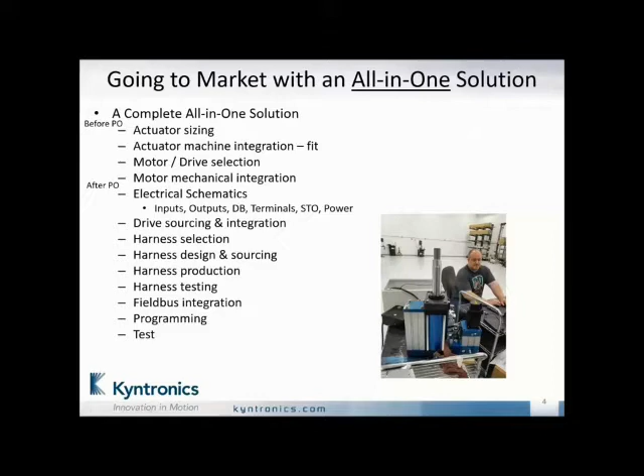There we go. So that's the all-in-one. It's unique because a lot of competitors do not do this. So it's something different that we all have to get used to. So the finger pointing is only Kyntronics. We're the owner in regards to the all-in-one. Nobody else to point the finger to.

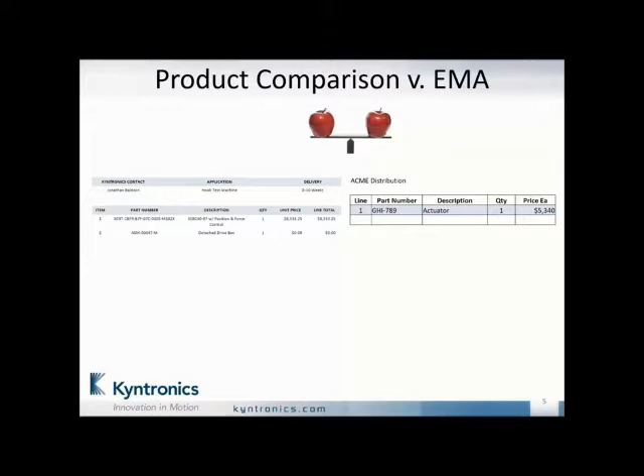We own the solution. So the product comparison versus the EMA. This is another important part of it, apples to apples. The customer's purchasing agents looking at our quote, looking at the quote from Acme Distribution, Actuator, hey, you're $3,000 more. We went through this before. Of course, there's that apples to apples situation. So obviously everything down here is itemized, but it's still not the same as it all being wired up and tested and integrated together.

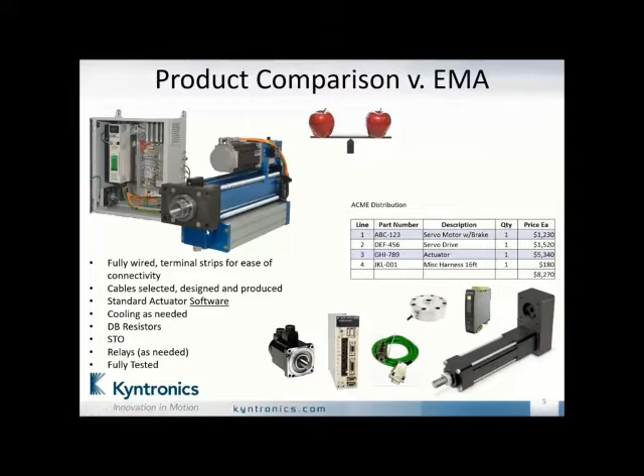Another important point is reliability in regards to the product comparison. Give you a quick example of a recent application. So this customer, decent opportunity, they went out looking for an actuation solution. They're looking at a roller screw solution as well as ours. And they're being open, they're sharing theirs with us and ours with them. And when we're looking at the application that the customer went out for bid for, we met their needs, and assuming that the competitor of ours met their needs.

Looked at the competitor, what they were offering, and our educated sales team went to the customer to educate them, stating that, hey, this particular actuator, the roller screw actuator, it's not going to last, and convinced them to go after the roller screw provider as well as their distributor and said, hey, this thing's going to last 6 to 8 months. What's going on here? And challenge them regarding the reliability of that actuator. After back and forth, they actually came back and said, you're right. And quoted a much larger actuator, bigger motor, bigger everything to get it more reliable.

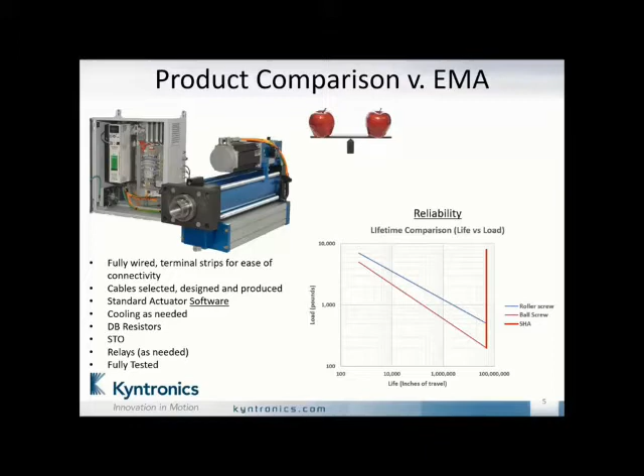But at the end of the day, they lost credibility and likely they lost the order. Because if we weren't involved, they would have supplied an inferior product and it would have been a failure for the customer. And in 6 to 8 months, they would have had to deal with warranty and returns and everything else. So this is just an important aspect to weave into your conversation with the customers, the reliability side of things.

So why is the SHA reliable? It's that simplicity thing. There's not a lot going on, and the more simple, the more reliable it's going to be, and vice versa. The more complex, the more failure points, opportunities for failure. So what's going on here? So you have this servo motor. It's coupled to a coupling that's coupled to the gear pump. Gear pump just rotates. The motor rotates clockwise, for example. Fills in the red side, pushes the actuator up, rotates counterclockwise, fills in the blue side, and pushes the actuator down.

As you can see, the volumes are different between the blue and the red. So when the actuator is coming down, that fluid needs to go somewhere, and vice versa. When the actuator is extending, it needs to pull. And this green portion here is your reservoir. And it just stores the fluid so it can go back and forth. So it's relatively simple. Again, a simple system leads to reliability. There's not a lot of parts going on here, no mechanical binding, any strokes available. It is an extremely efficient means of moving in linear motion. No hoses, no thread connections, it's just a positive displacement reversible pump.

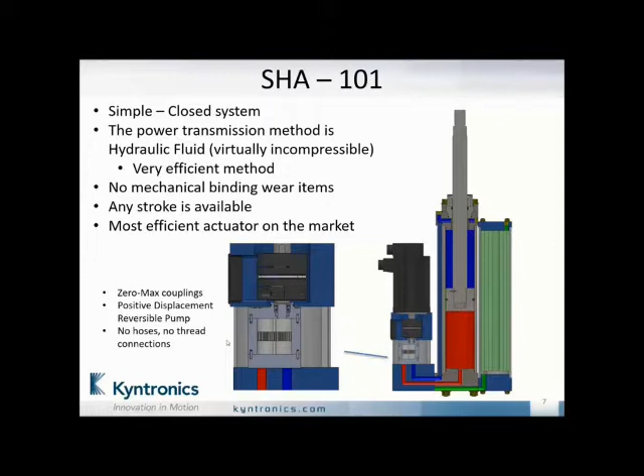The circuit itself is, again, simple. Not a lot going on. The motor rotates clockwise, as I mentioned. The red extends. Fluid comes out of the blue or goes into the reservoir, rotates counterclockwise. It's a relatively simple circuit. You can also have options of various valving. You have a cavity plug or check valve if you need to lock in place or counterbalance for overriding loads. So we consider all kinds of different situations there. Any orientation the actuator can go in, and again, it's a very efficient 4-quadrant control. Position force control is all available.

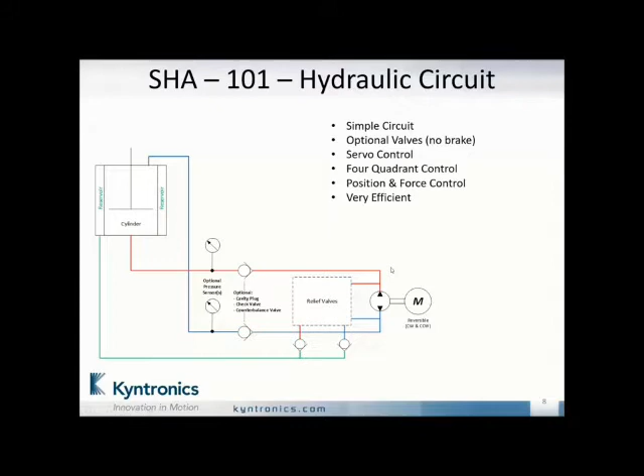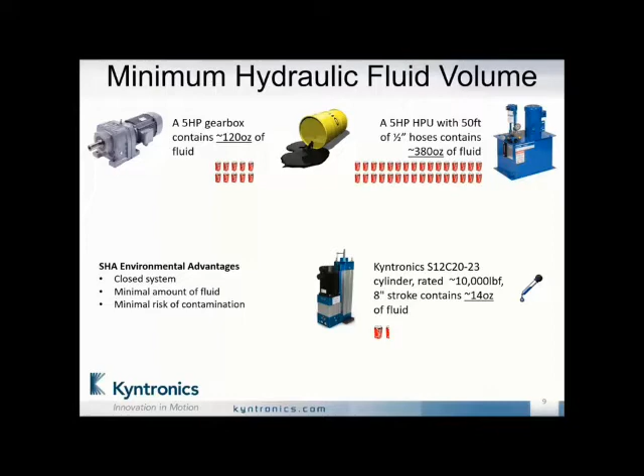Well, you say, yeah, but it's got fluid, and a lot of people don't like that hydraulic fluid thing. The EMAs have grease in them. They got fluid in them. Of course, if there's a gearbox, it's even more fluid. HPUs have fluid. Even in a worst case scenario, tow motor runs over the actuator, you're just going to have a couple of Coke cans of fluid that you're going to have to mop up. So it's not a lot of fluid. This is an example of a 10,000 pound force actuator, 8-inch stroke. It only has 14 ounces of fluid. So a minimal risk of fluid contamination or fluid spills. So this is a very good solution out there regarding the EMA replacement, etc.

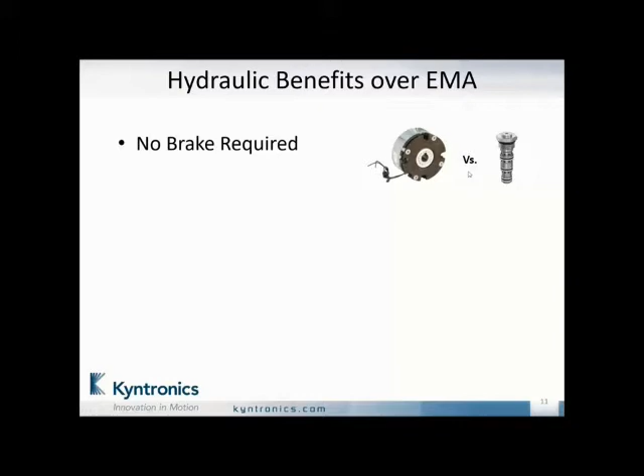Some of the benefits I want to just highlight regarding hydraulics versus an EMA. An EMA, in order to hold position, you have to add a brake to the actuator. Of course, you have to energize the brake. It takes away power. Not every move, but you have to energize the brake. It takes time to energize the brake, and then you move. And our solution, it's just a check valve. Simple little check valve that goes in and locks in position as soon as you stop. The fluid stops, the check valve is engaged. No brake required for the SHA. Force density, hydraulics is well known for its force density, versatile configurations.

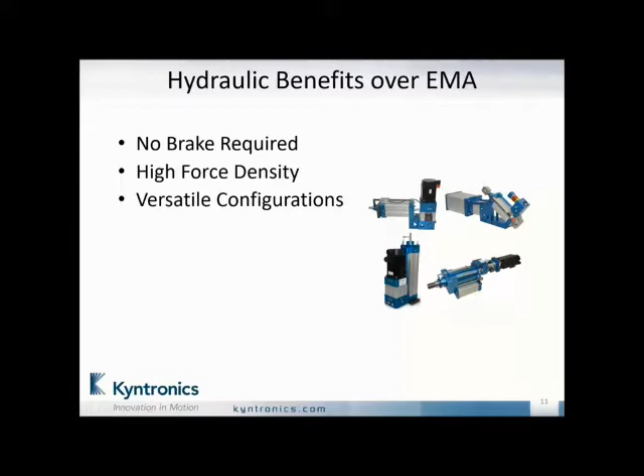Fluid in any direction. There's all kinds of different orientations to fit in the machine. We haven't had an issue yet. We had to be creative a few times, but again, with fluid, it's not an issue. With gears, it's difficult to move gears and belts and various things around. You have an inline and a right angle, that's about it.

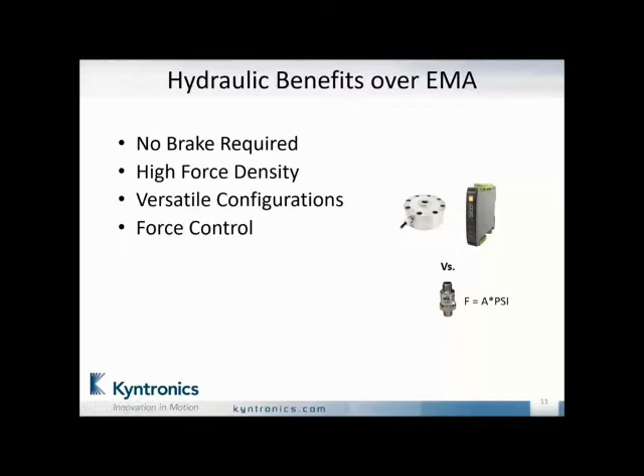Force control is another advantage. For an EMA, you have to have a load cell to do accurate force control, a conditioner; it adds complexity. Ours is relatively simple. It's just a pressure transducer. You know, the area is fixed. You know your PSI from the transducer. Again, it's simple. Closed loop force control is available on every actuator as needed.

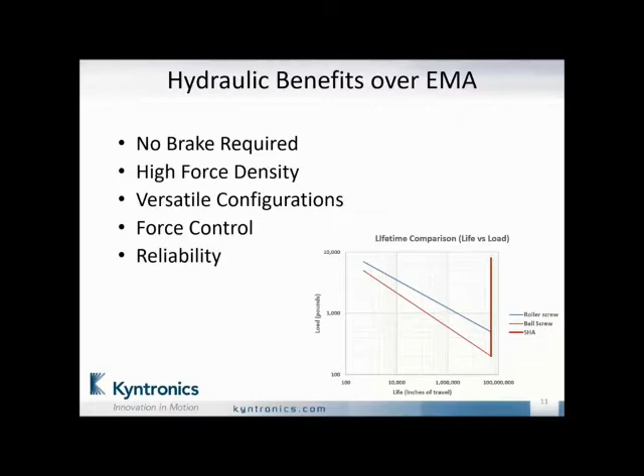Reliability, again, a huge benefit over the EMAs. It's a very simple solution, more reliable. Side loading, impact, and ingress protection, those are some of the things we're going to dig into in the next few slides.

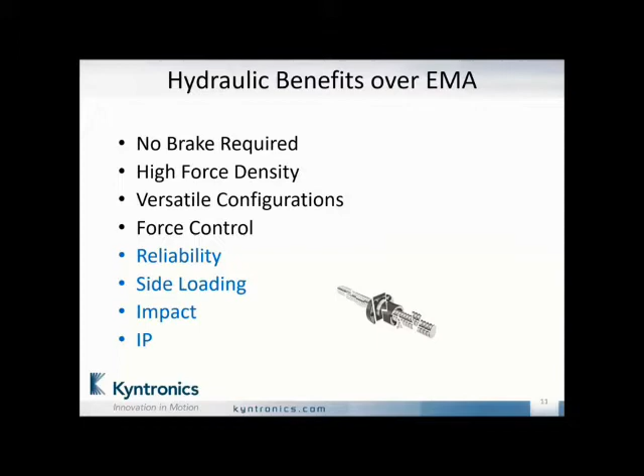Just wanted to go into, you guys have a gear pump, so you guys are going to have issues with wear as well. Well, that's not true. The gears are all encased in fluid. You have these pressure plates on both sides of the gear, and in between the pressure plates and the gear is a lubricating gap. There's some magic science with this stuff. It's very complicated regarding tolerances, etc. But everything needs to be lubed in here.

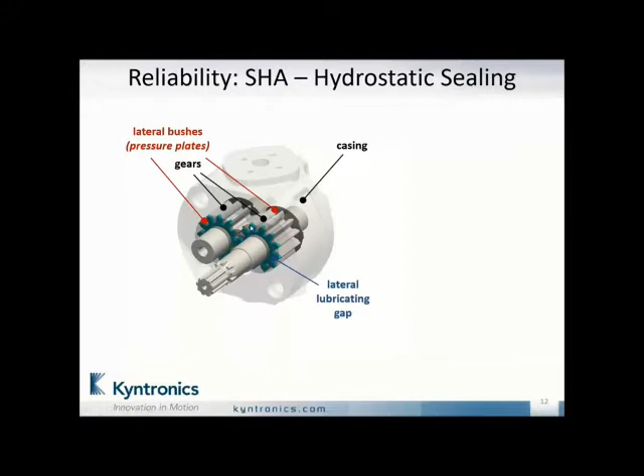There's no metal to metal between the gears. The gears push the fluid. Everything's lubricated. There's hydrostatic seals, hydrostatic bearings throughout the shaft, etc. So as the gears rotate, there's fluid moving all over the place, so there's no metal issues here.

Just an FYI, this is basically a gearbox. This is our gearbox. So when we need more speed, they increase the length of the gears. The gears are all shiny, high polished for all kinds of different reasons, but you just increase the size of the gear and that increases your flow.

The gearbox, if you have your ratio of 6:1, and you either increase your speed or increase your load, vice versa happens. If you increase your speed, your torque goes down. But now with this, you increase your speed, you can still maintain the 3,000 PSI as needed. Of course, you're going to need more power, but that's still all available.

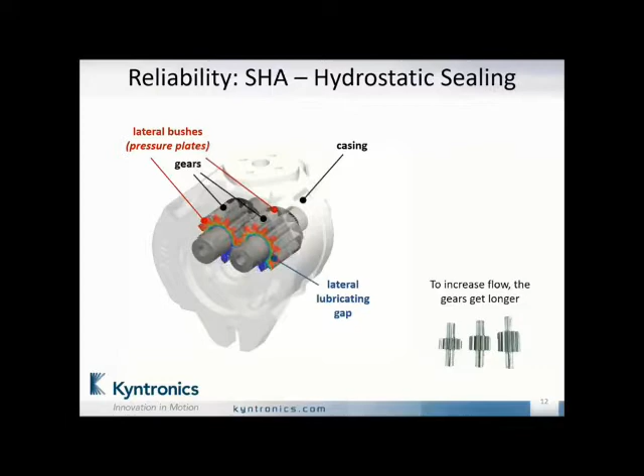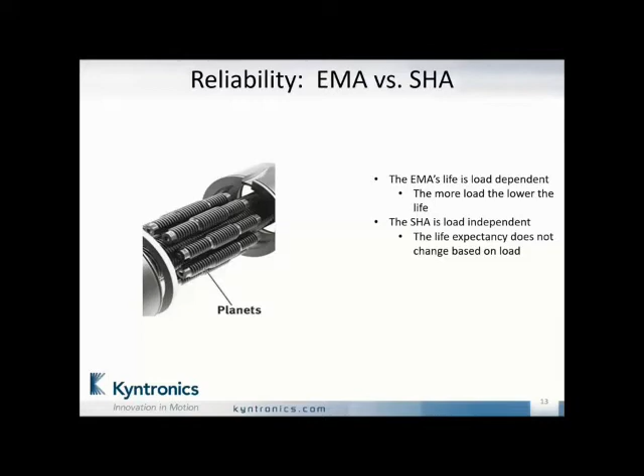Reliability, going on in this presentation so far. The third time we've brought this up, but yes, it's an important point. The more load, the less reliable the EMAs are, and the SHA is load independent. You can understand, as mentioned, the complexity of an EMA, roller screw, etc. The more complex, tight tolerances, all kinds of reasons for binding and causing potential failures.

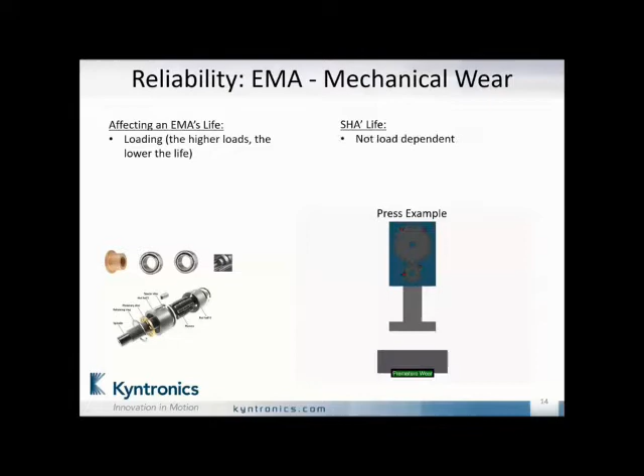Just to recap, some of the things affecting the EMA's life: again, loading, it's not dependent on an SHA. Impact loads, we'll get into a little bit here. No issue with the SHA. Side loading, major issue with EMAs. It's an issue with everything, but there's ways to get around it. We'll talk about that a little bit.

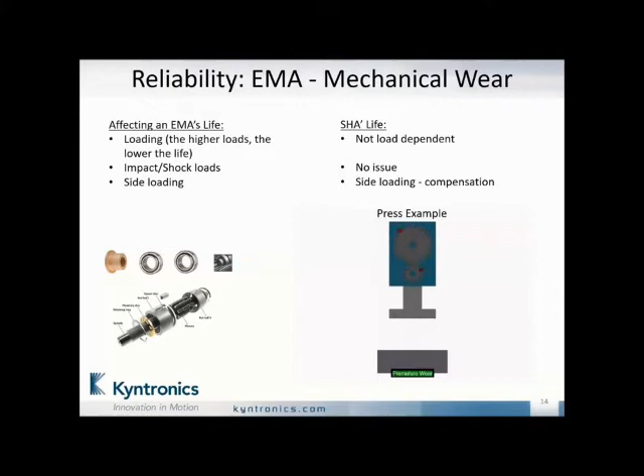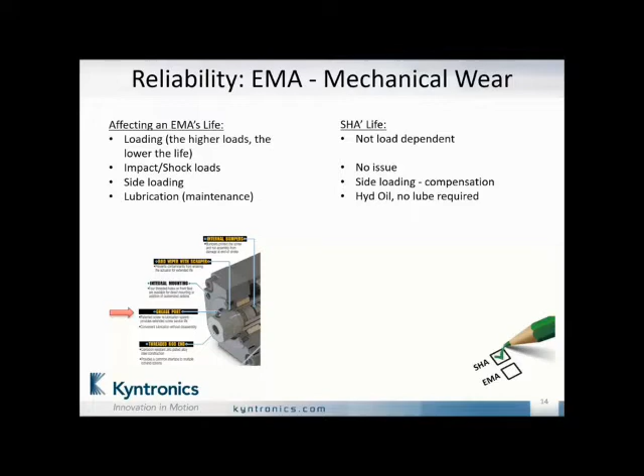And lubrication, always lubrication. You got to lubricate the EMAs all the time. With the SHA, it has oil in it. You don't have to lube. There's no lube required. Actuator choice for reliability is the SHA.

Impact and shock loads. EMAs are well known to have issues with shock loads. Even if you were to run the actuator, say jog the actuator all the way into its own stop, there's a likelihood of jamming all those components together. Again, it's complex, more likelihood for reliability issues, and binding regarding shock loads, little balls, issues, and potential situations.

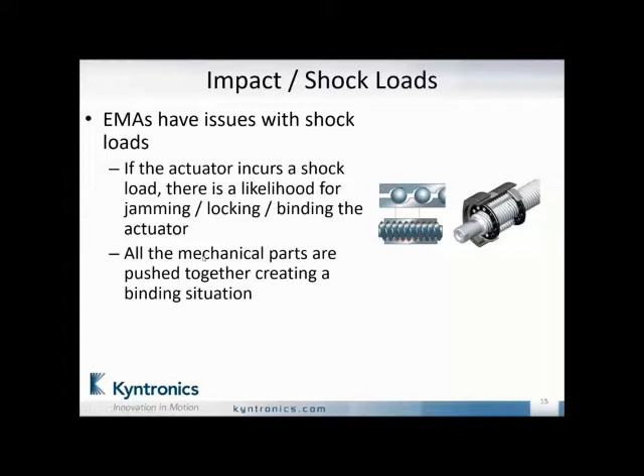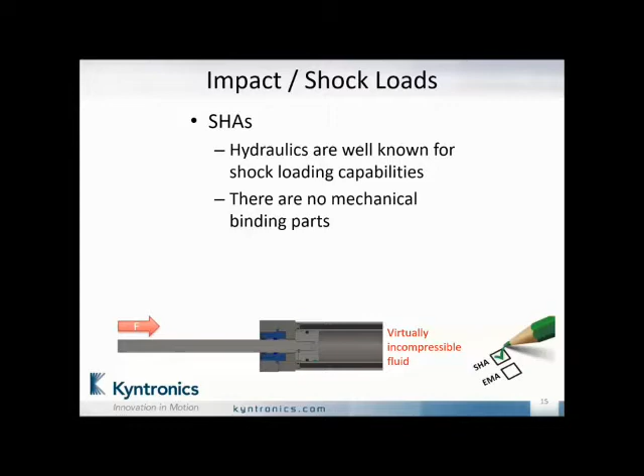The SHA, as I mentioned, is relatively simple. There are no mechanical parts for binding situations. You have that shock load with a virtually incompressible fluid. Not an issue for SHAs. Again, the SHA is the actuator of choice regarding the impact and shock loads.

Side loading, we're all familiar with that. There's all kinds of app notes, various fine print in the EMA world saying don't do any side loading. It's imperative that the nut and the screw are not exposed to side loading, only axial loading. If you know that incurs binding, it definitely can cause potential for failure.

Balls, contact points, they can roll up the non-hardened spots, causing wear and premature failure. Again, the more complex, the more opportunity for failure. Lever loads: you see a lot of hydraulic actuators on dump trucks and all kinds of various things having lever loads. EMAs do not like that. SHAs deal with it. How do they deal with it?

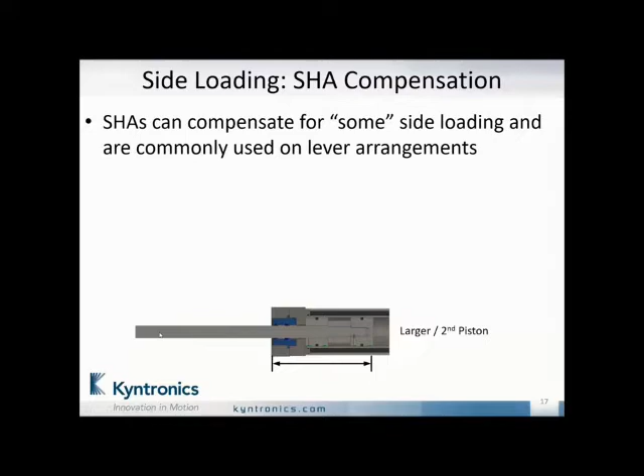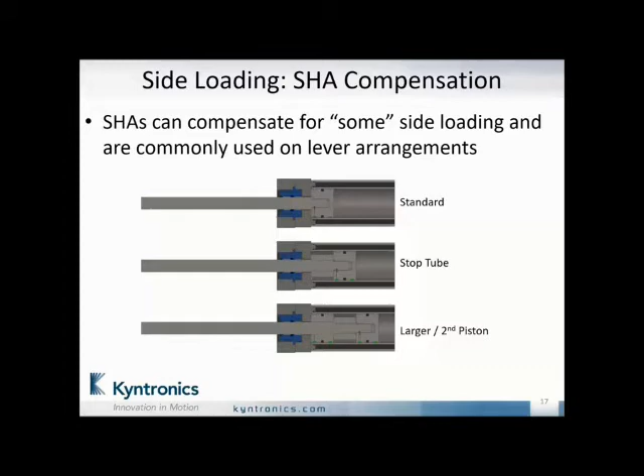Another example is you can go with a larger piston or two pistons, further increasing this distance, again being able to compensate for side loading. These are just a few examples of how to compensate for some side loads. Again, the EMA doesn't have that capability, and the actuator of choice for side loading is the SHA.

Ingress protection. We talked about this before. Ingress protection ratings for EMAs are static. When they start moving, they lose that ingress protection. It's no longer an IP whatever. So in all their documentation, you have the S at the end, static: IP65 is static. As soon as it starts moving, you lose that.

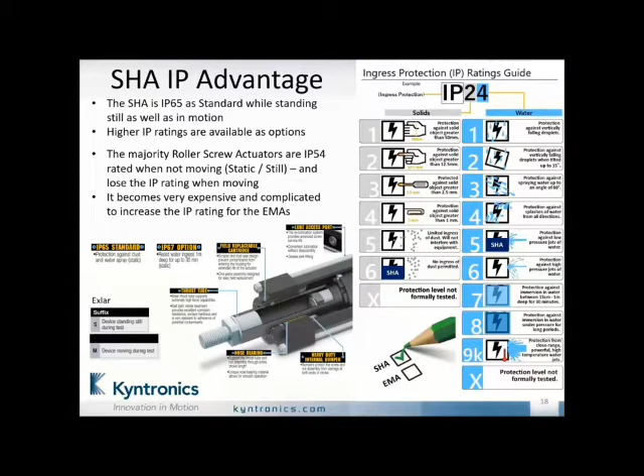Ours is IP65 out of the box. We can go higher as needed. We've got to make sure the hydraulic fluid does not get out, and while doing that, we make sure no fluid and contamination can get in. Same situation regarding ingress protection, the actuator choice is the SHA.

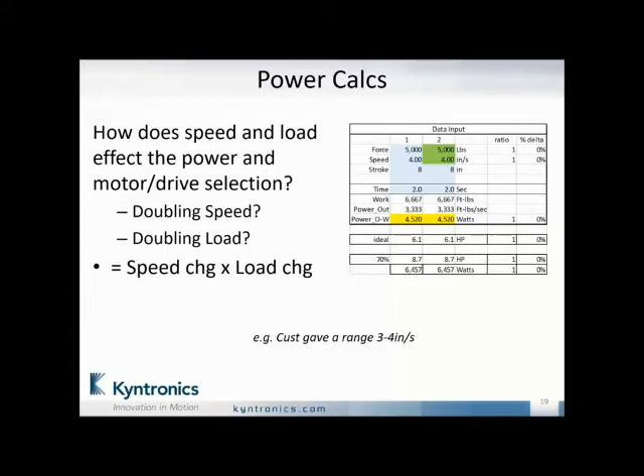So switching gears a little bit, I wanted to talk about some power calculations. Before I jump into this: one recent customer gave us some specs, 5,000 pound force, and said they want to go 3 to 4 inches per second. Well, the customer's always right, but going from 3 to 4 inches per second is a 33% increase in power. And that's just one point I'd like to try to get across.

To a lot of you it's obvious, I'm sure, but to some customers it's not. Just going from 3 to 4 is a 30% increase. So you're going from 6.5 horsepower to almost 9 horsepower, just between the 3 and 4 inches. It doesn't sound like a lot, but that affects the power. So let's keep everything the same. Let's say, for example, they have an application running at 5,000 pounds, 3 inches per second, and they require 6.5 horsepower for their application.

They're looking to upgrade. They know what this costs, and they ask, I just want a little bit more. So they say, give me 7,500 pounds. Well, that's a 50% increase. It would be a 50% increase in power as well. Well, if I'm increasing my force a little bit, I want to increase my speed a little. So let me go an inch and a half per second faster. That's another 50% increase in power. So you're going from the original 6.5 to almost 15 horsepower just by tweaking these numbers.

So what we've seen, and I'm sure you all have seen, is the customer giving a little bit higher numbers than are needed. That affects cost, of course. That affects the apples to apples comparison. It's just something to be cognizant of as we're going through things. Increase the force, increase the speed, you're increasing the power.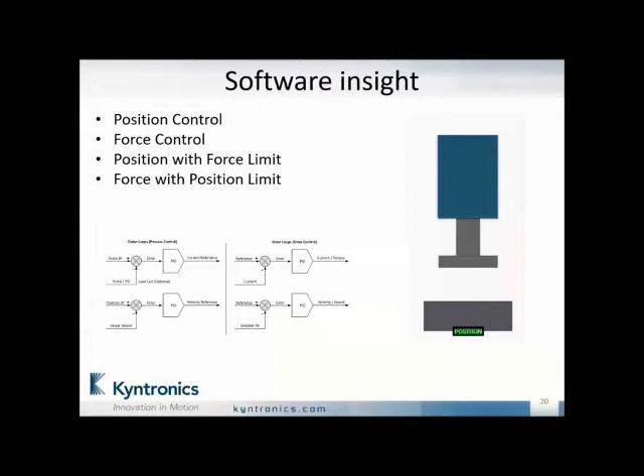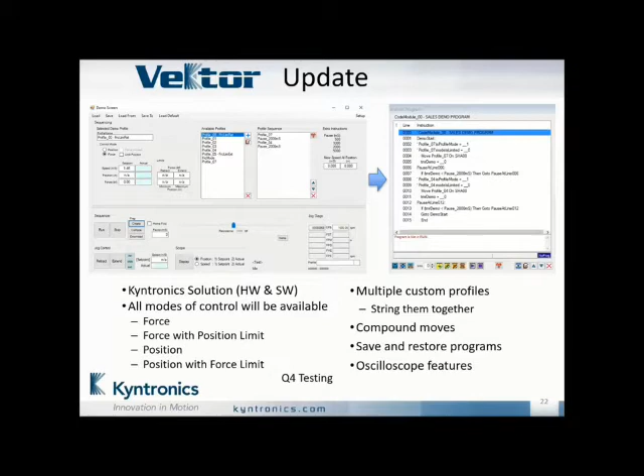Some things that are in development: all that software that we've already developed is included in the Vektor. That's actually ahead of the hardware. We're expecting some hardware in the November timeframe. We're going to be doing some testing and hopefully get this thing out to you guys in Q1 of next year.

Some other things that are in development. We're looking to try to do some higher speed capabilities. We're looking at a higher flow manifold, some larger pumps. We're also looking at a press package, an integrated solution. We have the actuator, we have the controls. We're looking to put together an HMI, a nice press package, and then go after like the Promess or other press packages out there in the world.

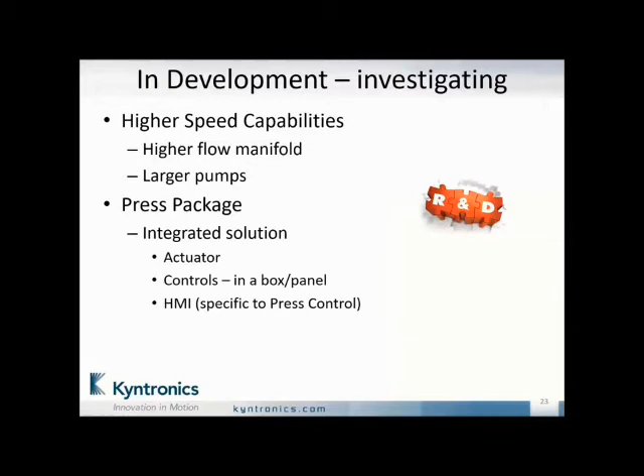So getting your input into this is appreciated. This is what we're looking at doing sometime in the near future. We're investigating these things. So again, give us your feedback on other items that would benefit you as well. Feed that back to your RSMs.

The AOI is progressing really well. The software is actually done. Giving you some insight, it's a simple setup. You can see here's a block. You would enter in your various needs, your force, min, max, pressures, your feedbacks, where it's coming from, scaling; all your same control capabilities are included in this AOI that I mentioned earlier. Feedback going back to the PLC.

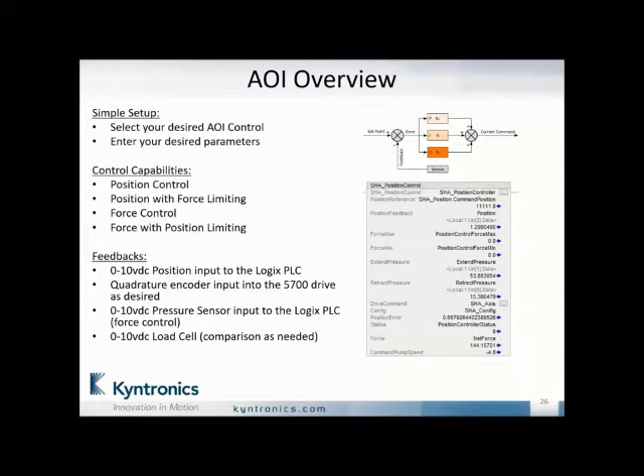As needed, you can do your position or force control, and it's again seamless in this AOI as well for the Rockwell solution. It runs the AOI in a PLC.

And we're still looking for beta sites. We have some, we're still looking for some more. The code is ready to go. Our documentation is being developed. Example code is being developed. We'll support you as needed. If we get some beta sites, we'll do a lot more support with the beta sites and help get things running.

FYI, Rockwell's also looking at a press template for a Rockwell motor drive and HMI along with the Kyntronics actuator and AOI software solution. Marketing, new material continues to be...

Hey, Oscar, can you put yourself on mute? You're overriding Carl there. Thank you. Okay, got it.

Thanks, Jeff. So new material keeps on being added to the marketing. Application success stories. We're doing some videos that should be out in the next few weeks. Updated PowerPoint; you've seen some things on this PowerPoint that are going to be added as well. So leads from the website. We're always trying to stay high on the Google searches, SEO. We're doing some vertical email campaigns, and hopefully we're going to get you guys some leads from all this effort. Follow us on LinkedIn as well.

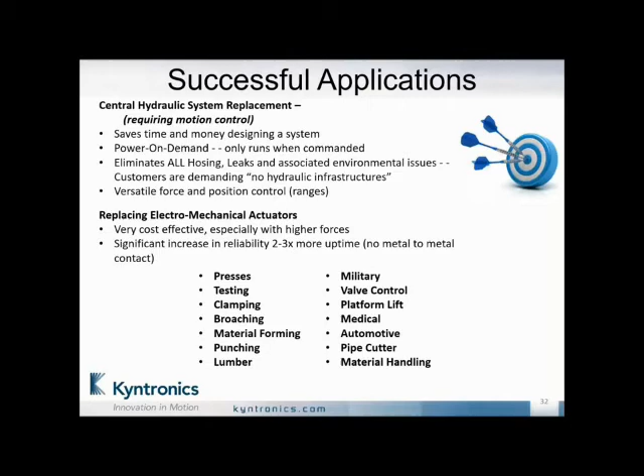We continue to be successful regarding replacing hydraulic systems and mechanical actuators, a lot of success there as well. They're having issues out there, that reliability thing is coming back to bite them, and we're taking advantage of that. Presses and testing are still very popular for us.

So the next couple applications, just wanted to show you some unique things that we're doing. This is a large valve control application, 90,000 pound force. Something to point out, it's a small little motor. So this guy is just regulating force. It's a slurry-ish type of material that's flowing through that we're controlling through a valve. In this situation, this compound slurry can get up to a certain amount of pressure. And what they wanted is an ability to dump quickly.

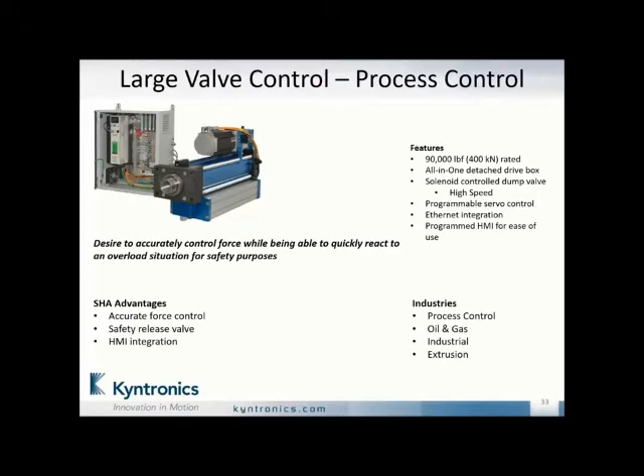So we put a solenoid valve in the back of here, and if there is too much pressure on the front of the actuator, for safety reasons, they want to be able to open up that solenoid, and the actuator zooms back based on the pressure of the slurry, pushes it back really fast, at 10 or 15 inches per second. So all that flow needs to be sized properly. So anyway, this is a good example of safety, the system will pop that valve right back, and it's a good process control, safety control feature. This one was installed overseas.

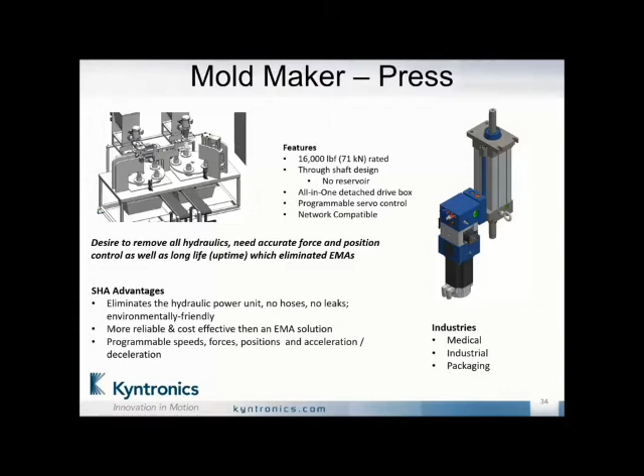Mold maker, press manufacturer. This is a unique application with a through shaft. They required a through shaft to fit onto their machine. The volume is the same on both sides of the piston, therefore you don't need the reservoir. And that was all required to properly fit on the machine, so they would not have to modify their machine. So this was a 16,000 pound force actuator that replaced hydraulics. They didn't want to go down the road of EMAs because of the shorter life, and chose this solution.

Wrapping things up, the all-in-one solution. Don't forget about that. And the apples to apples, our focus is trying to make the complex simple. Because the actuator is much simpler, it's a much more reliable, efficient solution.